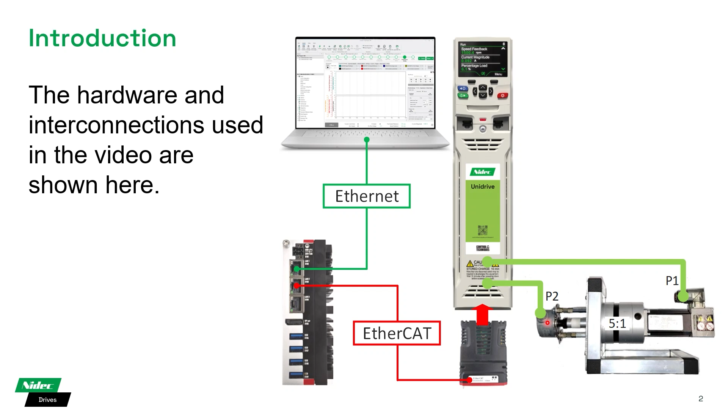It's a Control Techniques dynamic servo motor where the feedback device is plugged into the P1 interface in the drive, and that encoder is used to control the speed loop. The P2 interface is connected to an encoder that's on the output shaft of this 5:1 gearbox. So there's 5 turns in from this motor to 1 turn out here at this position loop closing encoder.

So just a quick overview of the loops. So we've got the current loop. Current loop takes a torque producing current reference which comes from the output of the speed loop. So any speed following error that we develop during running appears as a torque reference which is then sent to the current controller to provide torque producing current to the motor.

Then last in the line is the AMC position loop. So the AMC is the motion controller that's built into Digitax HD and into Unidrive M, and this essentially receives the reference from EtherCAT and then allows us to close the position loop on that reference.

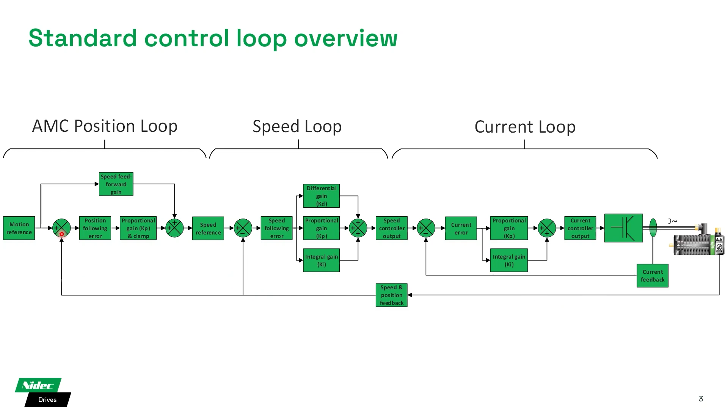Okay, so in a normal system, one that's not dual loop, you'll note that this feedback from the encoder on the back of the motor goes to close the speed loop and is also used to close the position loop. However, for the system that we're looking at, the speed feedback from the back of the motor is only used for the speed reference to work out what speed following error we've got. This second encoder, the one that goes into the P2 interface, forms the position feedback. So we'll be looking for positional following error only based on this encoder, ignoring this one.

Now, the upshot of this is that the speed reference that the position loop outputs needs to be scaled. This is simply because the speed that the motor this side needs to do compared with what this encoder will see the other side of the gearbox is the 5:1 ratio. So this motor needs to do 5 turns before you see 1 turn of movement at the output, and that needs to be compensated in the scaling. So that's what we're going to set about doing in the demonstration.

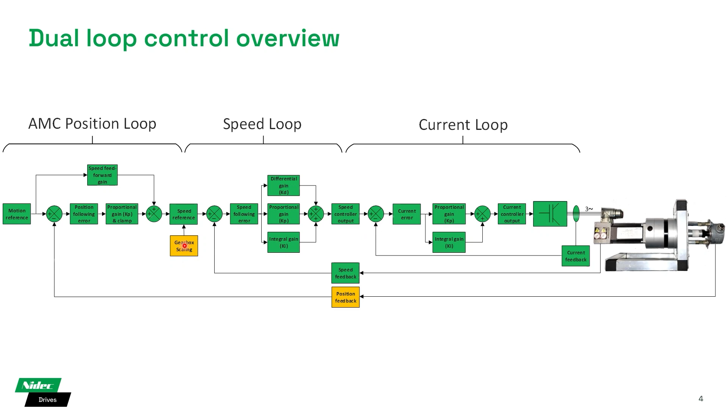So there are 3 objects that you need to set up in your EtherCAT startup list. The first of those is 0x3000. Now what this object does is it says, where is the position loop feedback going to come from? Okay, so for what we're going to do, we're interested in using feedback that's plugged into the drive P2 interface. So we need to set this to a value of 2.

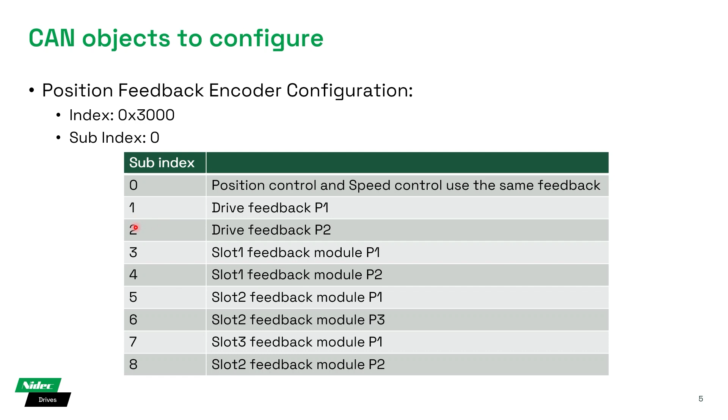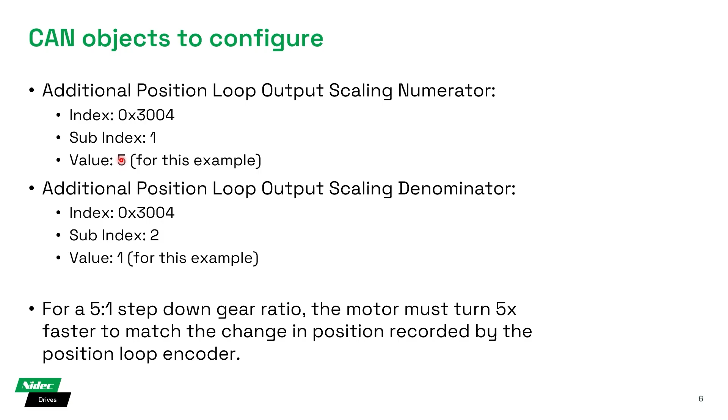Next, we need to set the position loop output scaling numerator and denominator. Okay, so that's 0x3004, subindex 1 is the numerator, subindex 2 is the denominator. And because our gearbox is 5:1, we need to increase the speed output from the position loop by a factor of 5, because our motor needs to turn 5 times as quick for one turn at the output of the position loop closing encoder. So you'll see that the value that we're going to set is 5 for the numerator to increase it by 5, divided by 1.

Before we get too far into it, I just want to point out this document.

So this is a kind of getting started guide that we put together to go along with this series of TwinCAT videos. And everything that you'll see in the video is covered by a section of this guide. So if you look, we've got how-to guides, how to set up a dual loop system. If I click that, this section of the manual follows along. So if you don't want to take notes whilst watching the video, or simply you just prefer learning from step-by-step guides in a book, we've got you covered.

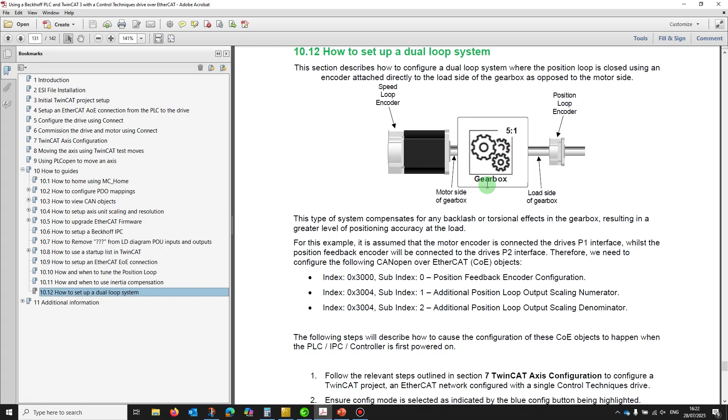So what I've done, I've already set up the drive to work as a non-dual loop system, okay? And what we've got to do first is we'll add another encoder to our P2 interface. So let's just open up menu 3, and I'm going to go to the second encoder parameters. So for the purposes of this experiment, I wasn't able to find a high resolution encoder, so I'm using a 1024 PPR incremental encoder, which is pretty low resolution, and you'll see that when we're looking at the following error, but I think it still demonstrates the point.

So first thing, I need to go and set the number of pulses per rev correctly, which is 1024. I am then going to set, there we go, the type to AB, because it's just a simple AB quadrature encoder. And I think that's probably enough for now. So what we're going to do is come back to the performance tuning tool, and we're going to test to see whether this encoder is giving us a sensible output, and if it is, is it in the right direction? So let's check that out.

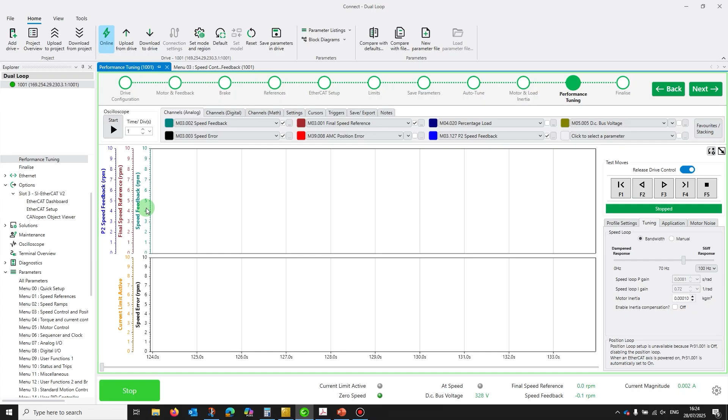So I'm going to take drive control, I'm going to enable it. I can hear that the motor is now enabled, and I'm going to add in an extra parameter. So I want the speed feedback from P2 so that we can take a look and compare. So what we'll be doing is comparing this feedback to this feedback, and what I'd expect is that the number that you get here will be 1/5 of the number that we'll see for our speed loop closing encoder. So let's take a look at that. So I'm just going to start the scope. There we go. So I'll just let that go for a sec and then stop the scope so that we can analyze.

So what we can see is that the peak speed reached, using this green line here, for the speed loop closing encoder is 300 RPM. If I go back to the profile setting, you can see that when we were jogging, 300 RPM. So that's done its job. What we can see is that the P2 interface encoder, although it's 1/5, it's 1/5 and negative. And the simple reason for that is the mechanical installation of the encoder that I chose meant that I couldn't fit it in exactly the same orientation. And that's quite a common thing. You're limited to what mechanical fixings you've got in your machine. So quite often you'll have to invert the encoder. So that's what we're going to do.

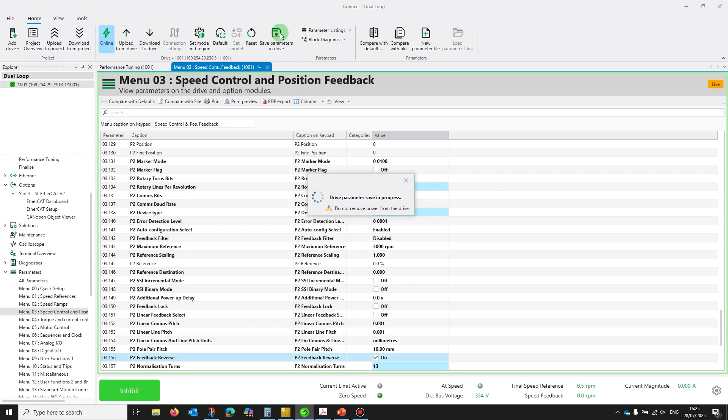So I'll go back to menu 3, and you will see if I go to this parameter here. Hold on. Just going to disable it and take off that control. I'm going to invert the feedback. So when you invert the feedback, you should do it with the drive disabled, because you don't want to cause a jump. So I've done that. I'll just save that. I'll come back and we'll test it again. So take control, enable the drive, start the scope, and run it again.

Now what you can see, I let that button go and stop, the sign of the speed now matches. Okay, so we're getting 60 RPM for 300 RPM feedback. So both of them match, and they're both in the same direction. So now we can have a reasonable degree of certainty that when we close the position loop with this P2 interface, everything should work how it's supposed to. So I'm just going to disable the product. I'm going to release control. So releasing control will now enable us to take control once we've finished the configuration in the TwinCAT environment. So that's what we're going to do now.

So the first thing that we are interested in doing is making our mappings in our startup list. So let's go to that. What you want to do is click on the drive that you're going to change the scaling for so that you can do your dual loop. Select the startup tab.

In fact, these are some old mappings. I'll go and get rid of those so that we can reapply them. There we go. And we go new. So if you remember, the first object that we're interested in is 0x3000. Because all of the CoE standard objects are actually listed in the ESI file that you would have loaded as one of the steps for setting up the axis, and this is all described in previous videos, you can just select it. And then what we're interested in doing is putting in a value of 2. So I'll click OK to that.

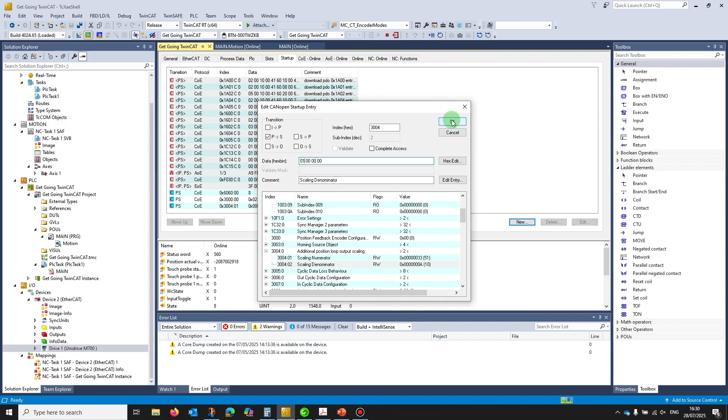There we go. So let's do the last one. The last one is denominator, which in our case, sorry, that didn't go, be 0, 1. There we go. Okay, so we've got our position feedback selected as 2. We've got our scaling numerator to multiply the speed output by 5 over 1. There's our scaling.

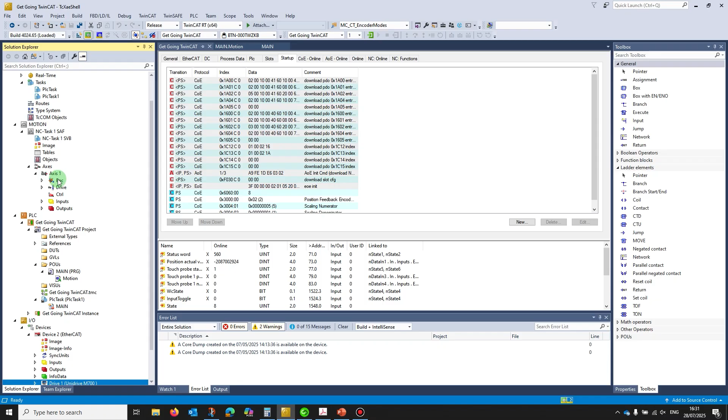So next thing is we want to push that scaling in. So I'm going to activate the configuration. So push that over. Actually, there's one other thing that I need to do, so I'll have to do that in again once it's finished. The next thing that you need to do is compensate for the scaling that the gearbox gives you, and I'll show you what I mean.

So here we've got the maximum reference velocity and maximum overall velocity, and this would be correct if we weren't doing a dual loop system with a 5-to-1 gearbox ratio in the way. So what we need to do is limit the speed that we request here to be the maximum for the motor, but also including the 5-to-1 gearbox ratio. So what we're saying is at the position loop encoder, we're only going to have 1/5 of the motor's maximum rating. So let's go through that process.

So if I get my calculator, cancel all of that. So what we want to do, I'll just show you in here. If I go to references, we can see that our maximum reference clamp speed in RPM is 3000.

Okay, so we need to convert from 3000 into units per second. So let's go back to our calculation. So if I look quickly at our encoder object, we can see that we've got 1000 units for 1 rev, in this case at 19-bit resolution per rev. But the number we're really interested in is how many units we've got per revolution in order to do the calculation. So it's this 1000 number that's actually of importance to us.

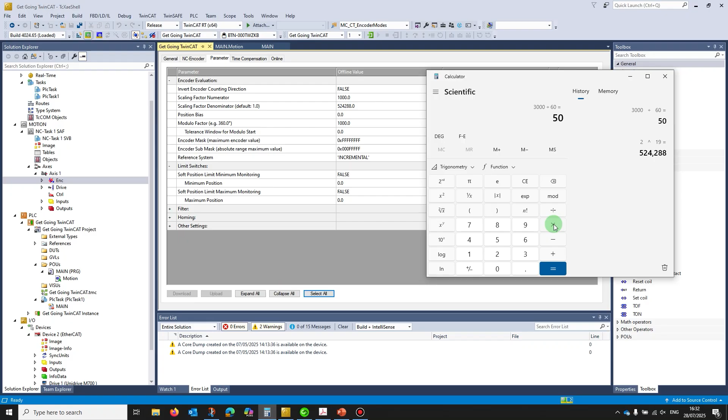So 3000 RPM, and then we need to go from revolutions per minute to revolutions per second, which is dividing by 60. And then, because this is revolutions per second, we need to get to units per second. So we times by 1000.

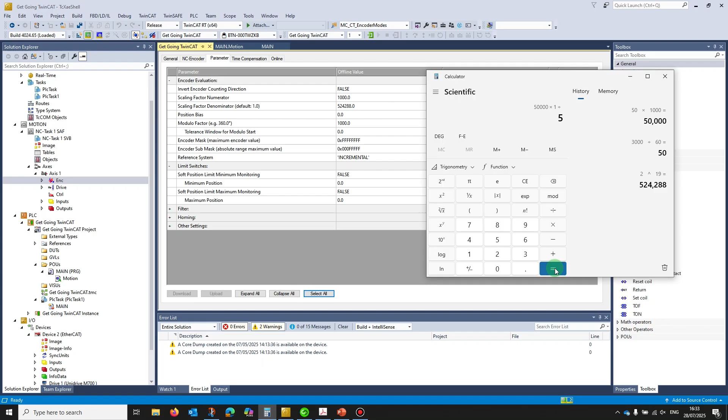Okay, now that's okay if we were at 1-to-1 with our position loop closing encoder, but we're not. We are 5-to-1 ratio. So what we need to do is times 1 divide by 5. I'm only using the numerator and denominator here to show you what it would be like if you've got a more complex ratio. So 10,000. So that's what we need to go and set our maximum speed limit to.

So, okay, there we go. So I am just going to activate the configuration to push that setting in. So let the system sort itself out. Hopefully. There we go. Right, now you can see that after activating the configuration, our revised limit that compensates for the gearbox is in there.

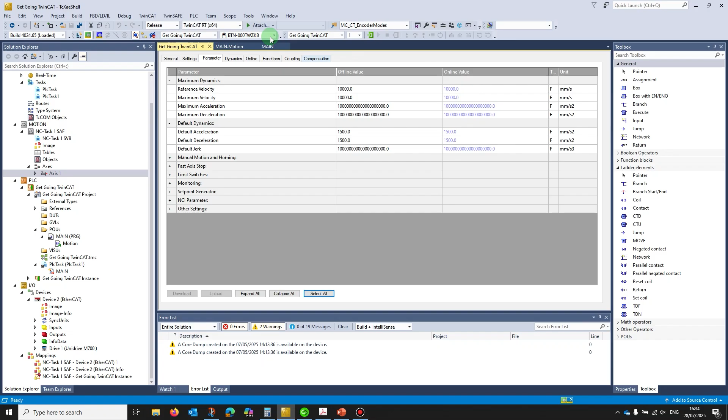So what we've got, I'm just going to push this program in. There we go. So I'm choosing to use from the CT&C axis library this function block, which is called MCCT position axis. So this is just saving me time from trying to couple a load of normal PLCopen blocks from the NC axis library, like MC power and MC jog. All I've got to do is plumb in the axis ref name and then enable the drive and get going. So that's what I'm using.

There'll be other videos in the series that fully explain how to use this interface, but for now, essentially what this is doing is causing an MC move velocity to allow the axis to jog at 1 revolution per second, which is the same as 60 RPM. So let's do that. There we go. So I've just enabled the drive, I've given it drive on, and now I am gonna jog. So I can hear my motor working.

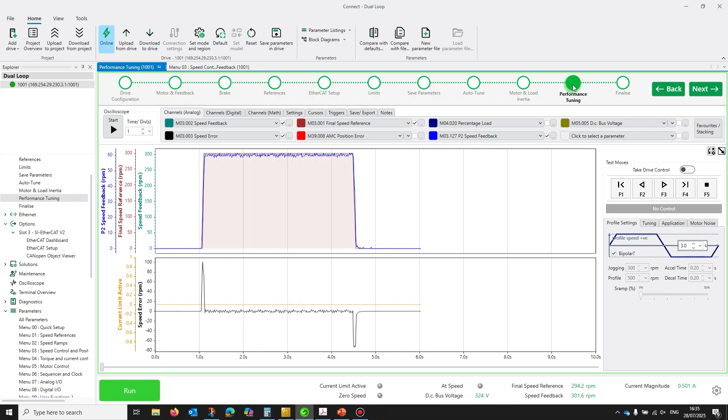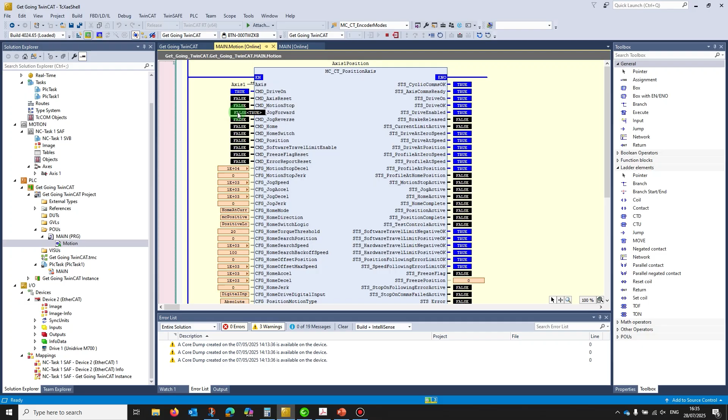Let's go and have a look to see what that looks like on our scope. So what we can see, in fact, because the maximum scaling looks a little bit strange, I'll just stop it, just so it goes from 0 to our maximum. Otherwise you're not going to be able to see anything. There we go. So

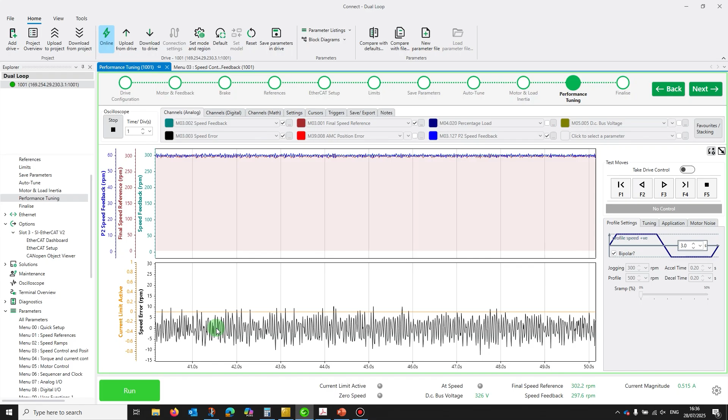what we can see is that now we're actually controlling over EtherCAT. We've got the references that we expect. So it's 1 revolution per second or 60 RPM at our position loop closing encoder. Our speed reference to the product has been multiplied by 5, which is what we want, so that they match each other, and our speed feedback error is roughly 0. Now what I also need to do is include this, and what you can see is that there's no offset in the value of the error.

If you've got your scaling wrong in some way, what you would find is that this overall value would be offset positive or offset negative. If you can see that it's roughly centered around 0, I wouldn't worry too much about 1 or 2 RPM because the position loop will soak that up. But if there's a reasonably significant error, then you probably want to have a look at your gearing ratio and make sure that you've actually got that correct.

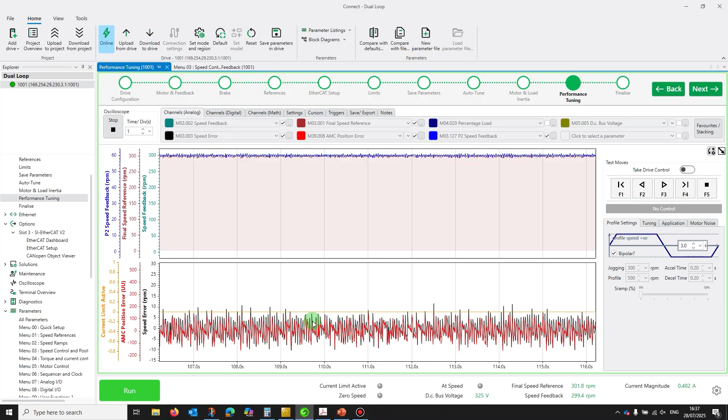What you will notice here is that obviously the waveform is pretty rough because the position loop closing encoder that I had available that would fit my rig is only actually giving a true resolution of 4096 counts per rev. So, you know, normally it wouldn't be quite as rough as this, but it's just related to the particular hardware that I've used in this demo. So there we go. That's everything that you need to check for and how to set it up.